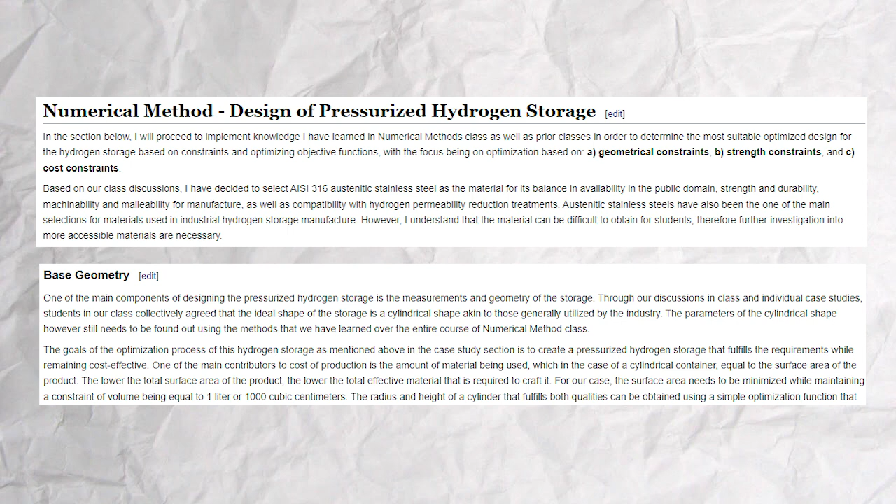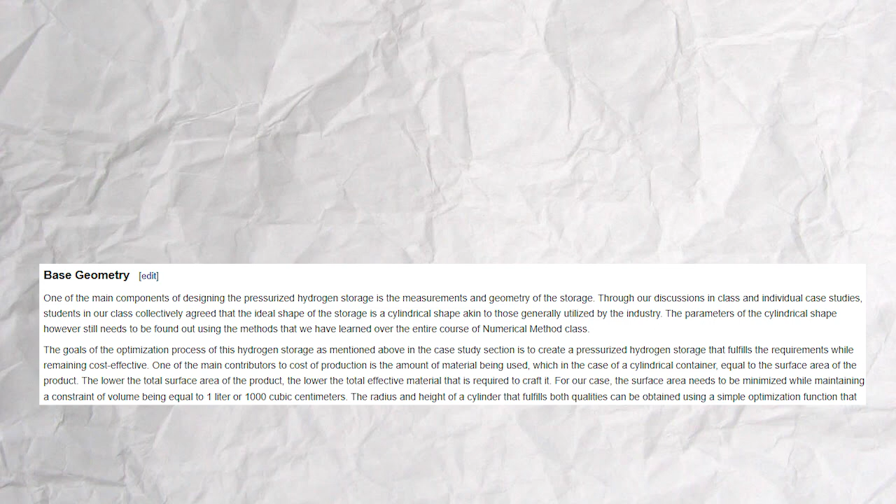For the geometry, the objective was to minimize the surface area of material required to manufacture while keeping the same required volume, which is 1 liter or 1000 cubic centimeters. Using methods learned in Numerical Methods class, I decided to form a code that will numerically determine the radius and height by minimizing the surface area function.

I was conscious of my limitations in directly making a precise code, therefore I broke down the code into 2 segments: the first will find the coarse range of minimum surface area before the second will precisely determine the smallest radius and radius to height ratio for minimum surface area.

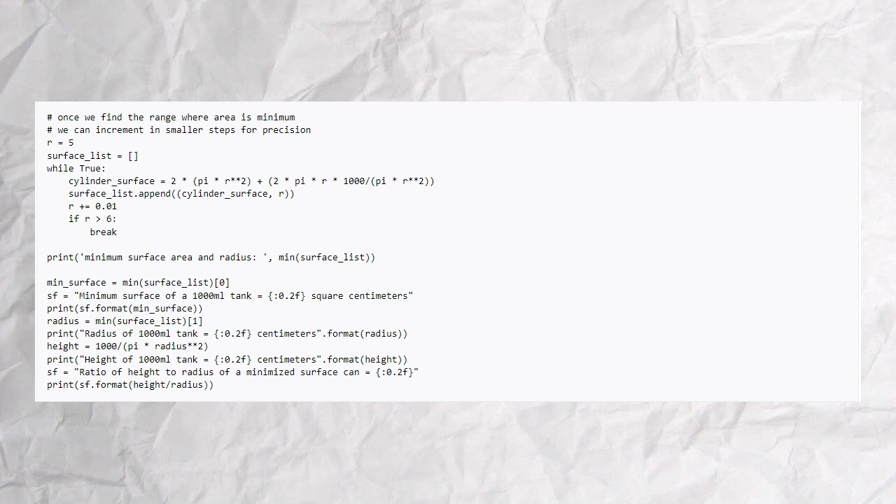In line with my conscious effort, I recalled from past courses that corners in typical cylinders serve as stress concentration regions, which are dangerous. Therefore, additional geometry needs to be implemented in the form of end caps that took 3 possible shapes: hemispherical, ellipsoidal, and torispherical.

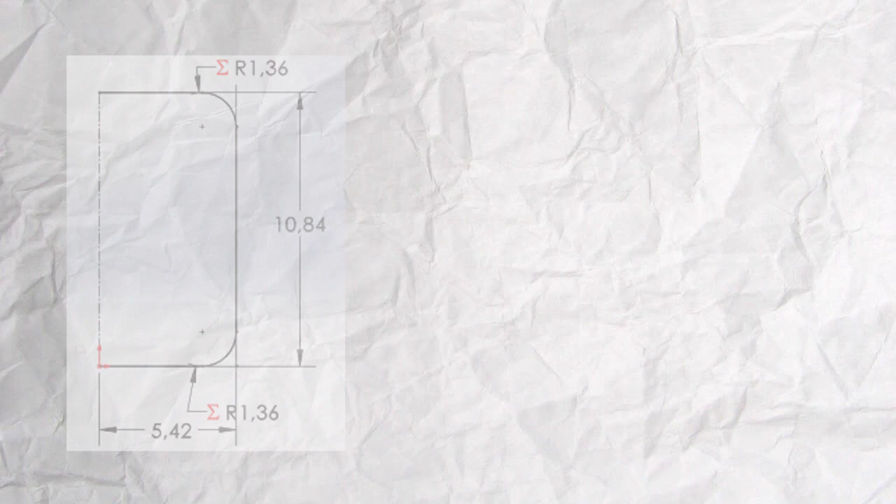Among the 3, torispherical resulted in the least surface area, which is why I selected it, and designed it by filleting the ends of the cylinder, but I was conscious that this will slightly reduce the volume. Therefore, I needed to compensate somehow. By using an algebraic comparison, I formed a function to calculate that the volume actually decreased slightly during the filleting process, and using the new volume with the code, I obtained the new radius and height values.

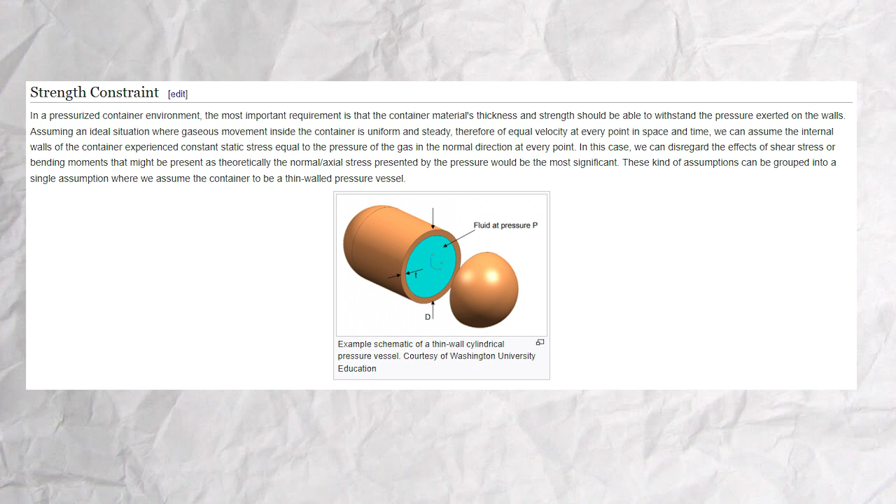With the geometrical constraint resolved, the next was the strength constraint. With some research, I found that the 2 main stresses experienced by these kinds of containers are hoop and axial stresses. A simple formula can be obtained if we assume the container to be a thin wall vessel, where the thickness was maximum 1/5 of the radius.

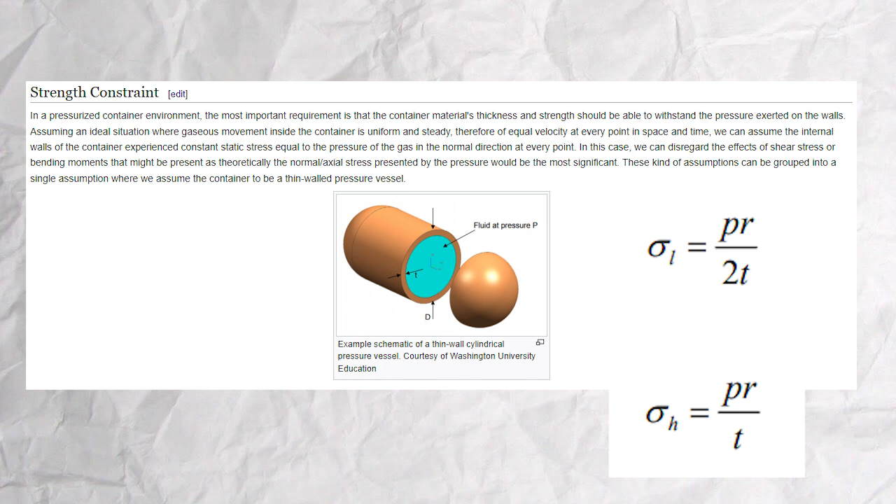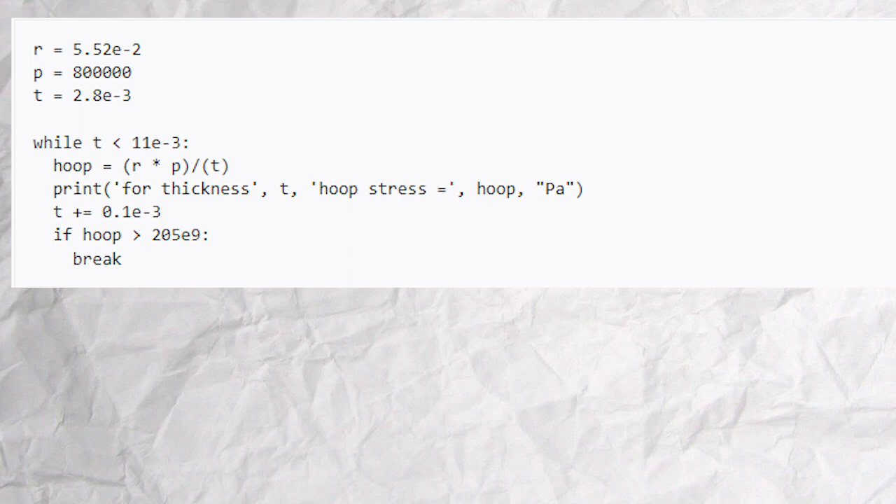From literature, there was also a suggestion for the minimum thickness of such vessels, and with these additional constraints, I used a simple repeated iteration code to determine the maximum stress experienced at different thicknesses with the lower bound and upper bound based on the research that I did. However, all the thicknesses did not exceed the mechanical properties of the material I selected, meaning we need to select the thickness by the last constraint, which is the cost.

I searched for data on prices of stainless steel 316. I assumed that the manufacture of a small thin-walled container would be similar to the manufacture of beverage containers, which were mainly by sheet metal forming, which means that I searched for SS316 metal sheet prices and selected a price range from a local distributor and took the price per unit area approach and simple iterations in Excel to test the prices of material required at different thicknesses that were sold by the manufacturer.

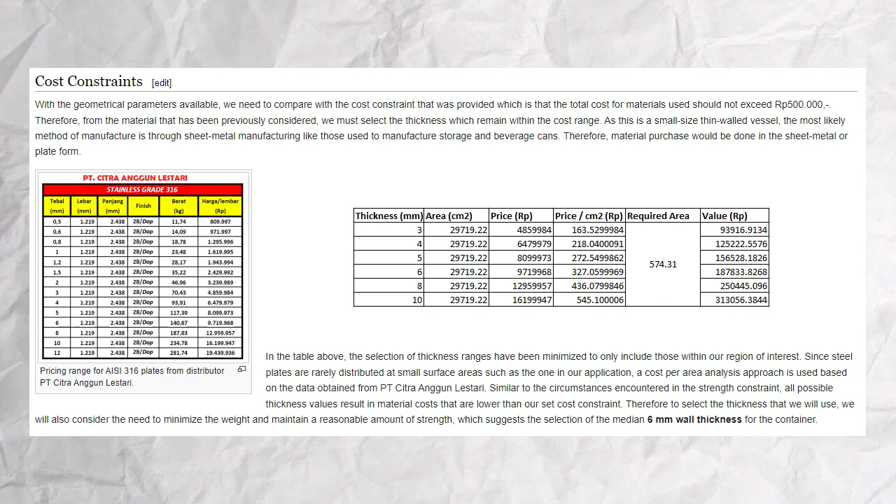Unfortunately, again, all the thicknesses did not exceed the maximum price of 500K, which meant that I needed to select arbitrarily. I selected the median 6mm thickness for balance and utilized a computer-aided design software to make a 3D model and applied simple simulation to test its strength.

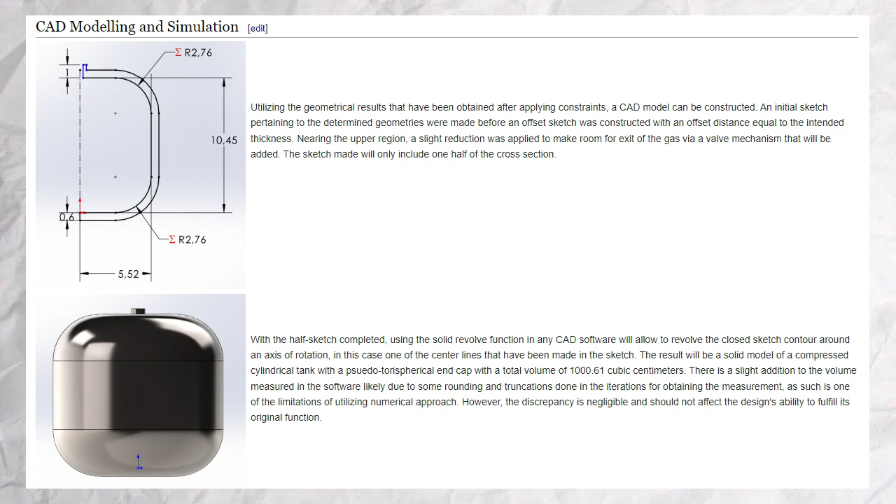With the assumption that it is a thin-walled vessel, the pressure exerted at all parts of the inner wall is equal, and therefore a simple static test showed that no deformation is likely to occur, but the model was likely over-designed. In response to this, my final design used the minimum thickness of 3mm with the same properties and added a needle valve that I previously designed to highlight the container's functionality for storage and transport of hydrogen gas.

From the process and the result of this project, it became clear to me how important and applicable consciousness is for facing our tasks and daily lives. My conscious effort included a step-by-step approach, understanding my abilities and limits, as well as recalling all knowledge that I have obtained in the past to tackle a present problem. Through this practice, I hope to face my days maintaining conscious effort in the face of all my problems and remain grateful for all my abilities and shortcomings.